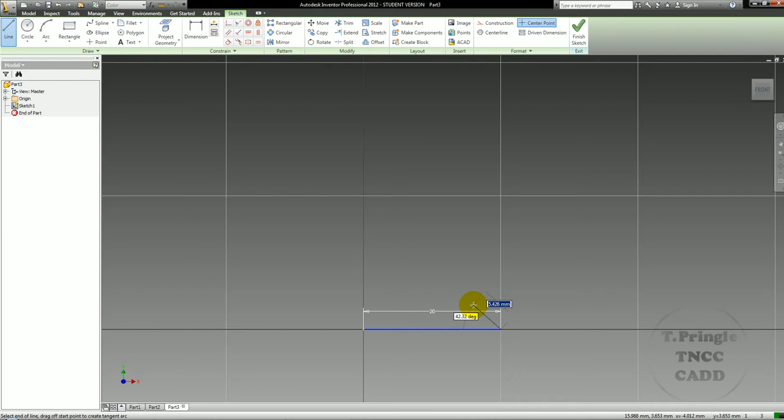So we'll draw this up here, straight over, down. We'll get that going back over here, draw it up a little bit, bring this angle up, and then draw straight up, straight over.

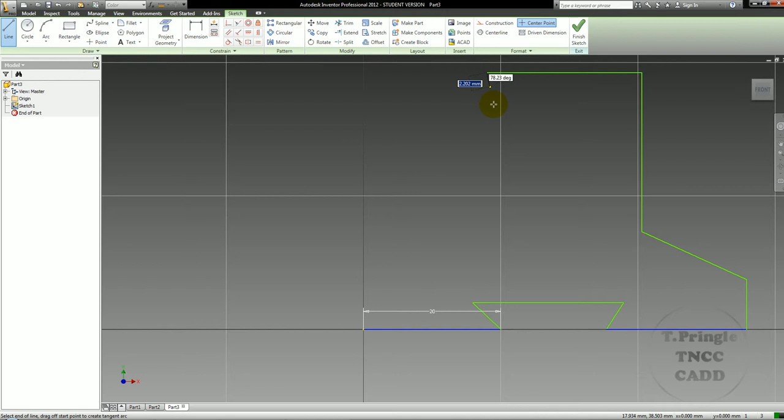Not necessarily worrying about dimensions right now, I'll take care of those in a few minutes. Get all of my angles and stuff in, and say I'm done. I do need to trim out that little section right there because I wasn't paying attention when I clicked with my mouse.

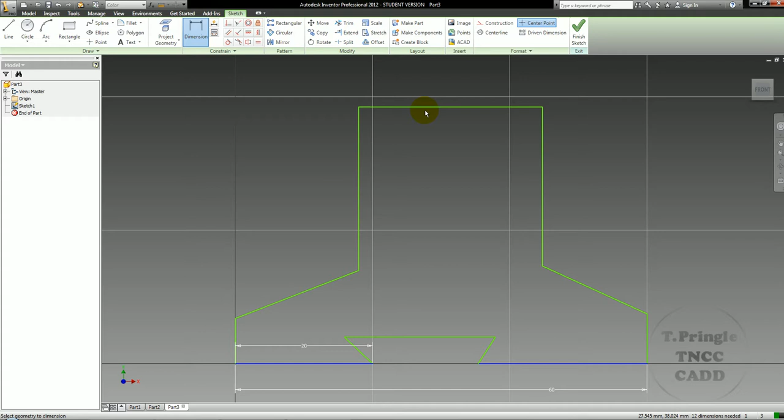So now between here and here we've got 60, so I'm going to go ahead and make that 60. The overall height of this entire block is going to be 40, so I want to come in here and put in that 40.

Now I've got a lot of things to work with. I'm going to do a couple of equal constraints. I want this segment here and this segment here to be equal, and this and this to be equal.

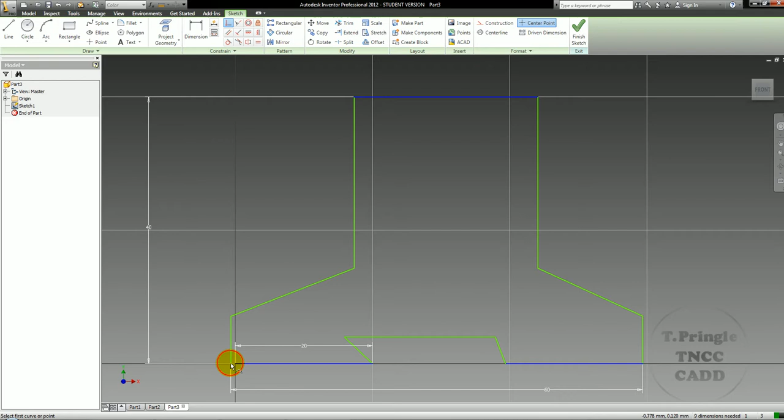I need to do a coincident constraint because I lost it when I trimmed between here and here. That should make a couple of additional things look a little bit better. I want equal constraints between here and here, here and here, and that should pretty much set up everything to be nice and symmetrical the way it's supposed to be.

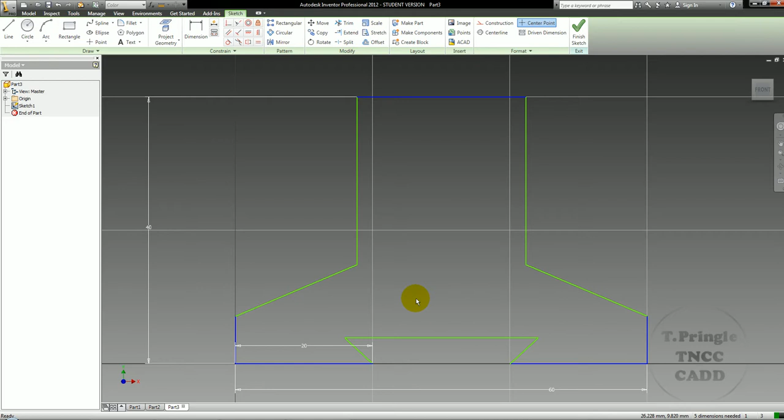So now I can continue dimensioning. I know that this right here is going to be a 45-degree angle. The height of this cut that goes in is going to be 5. The height of this segment right here is 13.

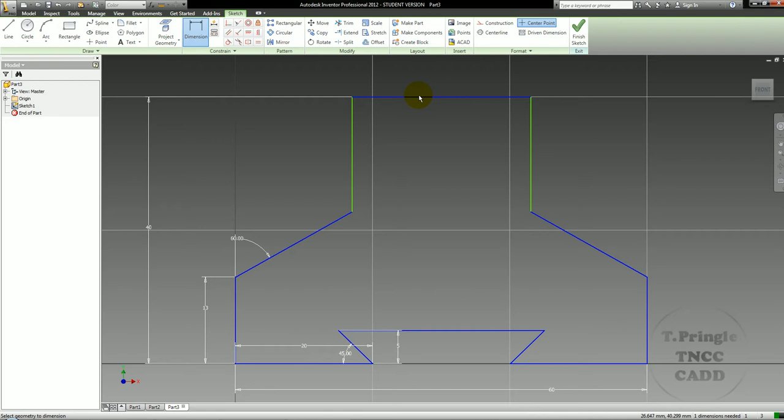This angle from vertical is going to be 60. The width of the top of this feature is 20. Okay, so now I've got basically all the information that I need to go ahead and do my extrusion.

So I'm going to go ahead and finish the sketch and extrude. My extrusion distance is going to be 45.

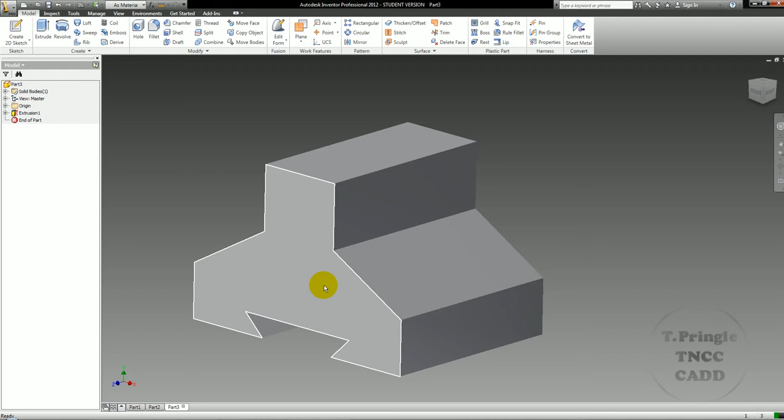So now that I've got this, I can begin to work on some of the additional features for this particular part. One of the things I want to do next is put that cutout that's going to be on the front. So I'll do a new sketch on this surface, and just draw a line straight across the top.

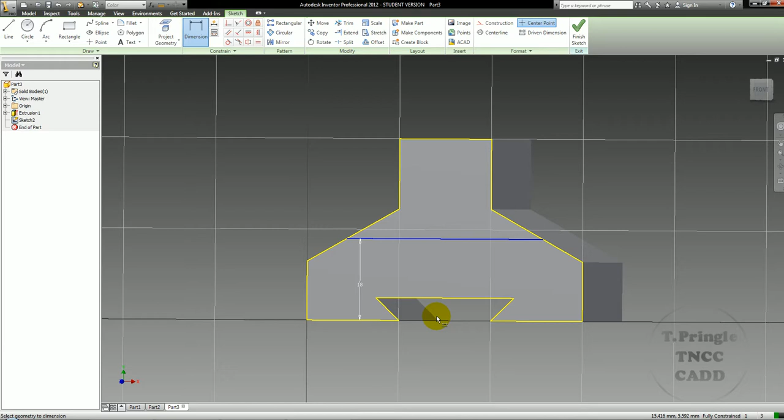I know that cutout has a dimension of 18 from the bottom, so come down here and make that 18. And now I can actually extrude that, picking this as my profile, setting it to cut. I want it to go back in a total distance of 10. So there is that cut.

The next thing that I want to do is a draft, and I'm going to use a fixed plane draft. This is my fixed plane. This right here is the face that I want to draft.

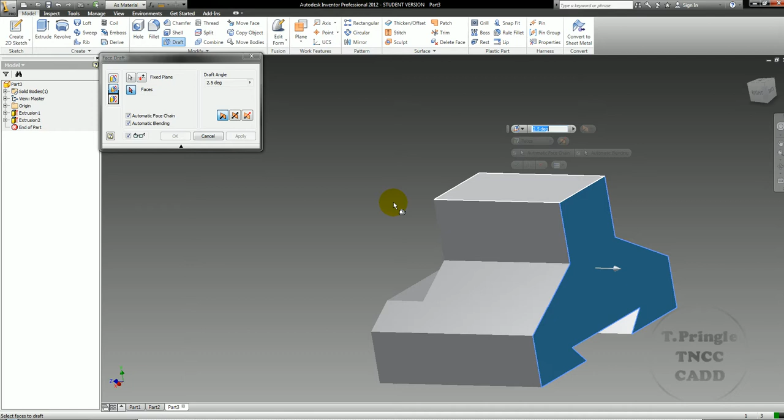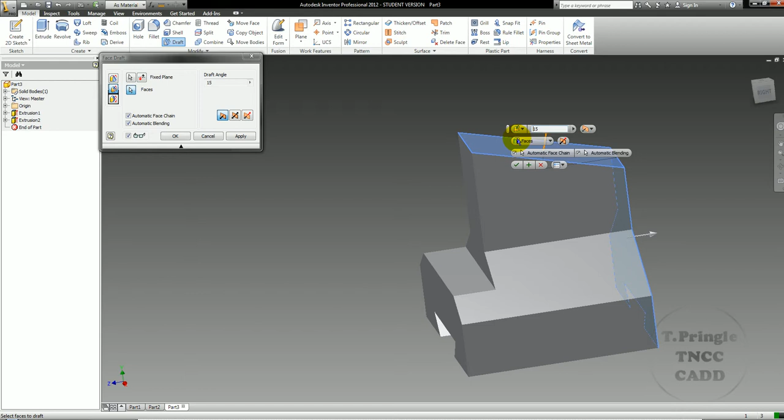Now, this is saying that it's 105 degrees from straight up. Straight up would be 90 degrees. So the key here is I need to figure out that 105 minus 90 is 15 degrees. So if I type in 15 right here, I can see that I need a negative 15, which is going to drop that front face down by negative 15 degrees. So all I've done is taken the 90 out of the equation to use the 105.

So we would have 90 to here and then another 15 to right here. So I can go ahead and apply that, and I've got my face draft in.

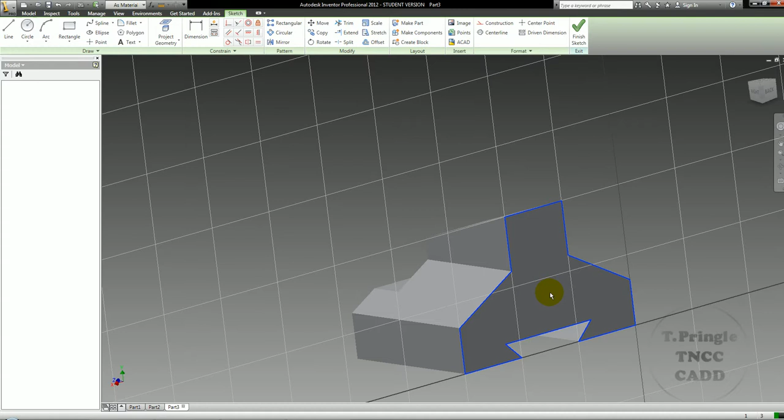The next thing I need to do is a new sketch on this back surface so that I can get the cutouts in the back. To get these cutouts and make my life a little easier, I'm going to use project geometry, and I'm going to project these two lines and this line. I couldn't see what that was doing initially, but there's everything that it's done.

Now I can go ahead and draw a line from this intersection straight down and this intersection straight down. And I can trim out stuff that I don't necessarily need, but realistically at the end of the day it's not going to make that big of a difference.

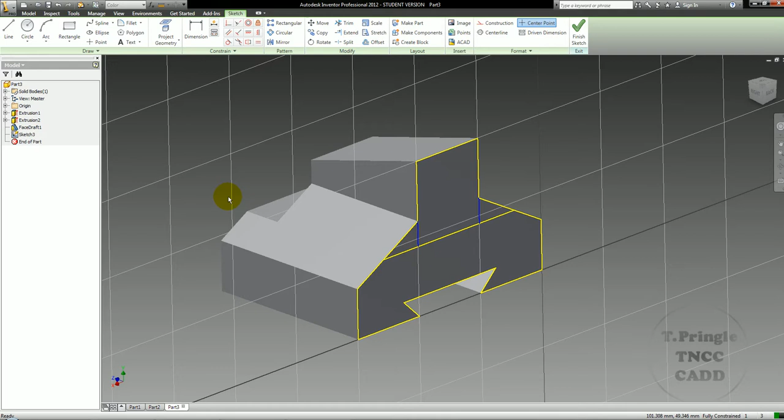When I go to extrude now, I can select this cut profile and this cut profile, select cut, distance is already set to 10, say OK. And there we can see the completed object P3-15.